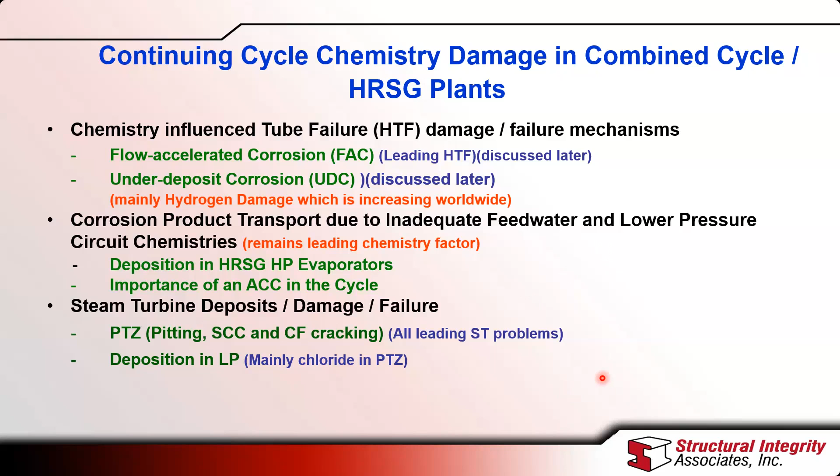I have to click this each time. So here's just an indication of the damage that occurs in the steam turbine. I show this because I'm going to deal with the tube failure mechanisms in detail. The two main ones that take place are corrosion fatigue of blades and discs in the phase transition zone of the low pressure turbine, which I'll explain, and stress corrosion cracking in the discs. You'll see some pictures here, and I'll talk about a few of these in more detail.

What we've come to recognize over the years of conducting a large number of assessments in combined cycle plants and conventional plants, now over 270 plants worldwide, I'll show you the data from this a little later. It confirms that all of this failure and damage you've just seen can be related directly to plants operating with what we call repeat cycle chemistry situations. There's basically nine of them. I'm going to highlight some of these for you, but these are areas where plants are not addressing the chemistry in an optimum fashion, and I'll talk about each one as we go through here.

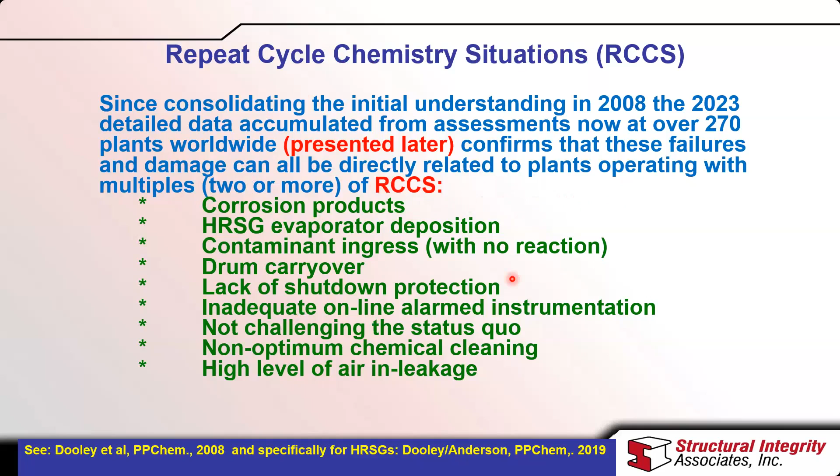So let's provide 3 examples. The first example is going to be on hydrogen damage. This is an under deposit corrosion mechanism, basically because the damage takes place under a heavy deposit on the HP evaporator tubing. There have been multiple cases already this year of this mechanism, and it's becoming very important.

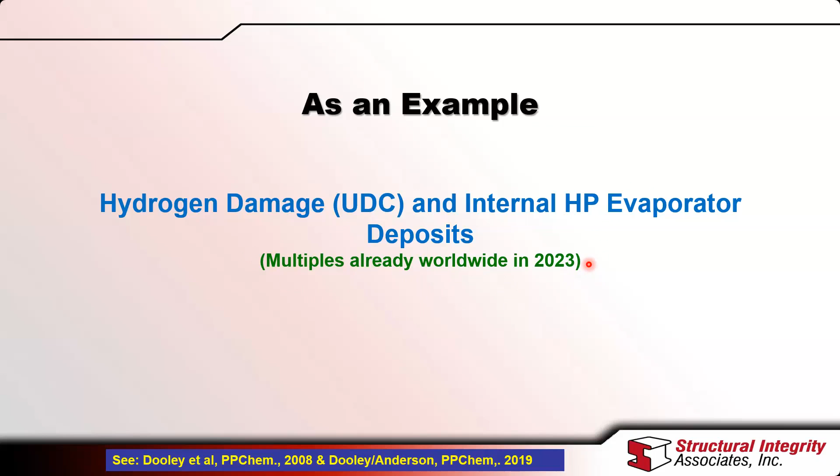It's a little bit distressing because we understand pretty much everything about hydrogen damage. So these are some of the examples that we have collected. Here you can see an HP evaporator tube, and you can see some very heavy deposits, internal deposits, and some quite serious corrosion just taking place here.

When we look at the inside surfaces, you see, expect to see heavy deposits like this. You cannot have hydrogen damage or under deposit corrosion unless you have these heavy deposits. The failures that occur are usually similar to this, like a little window or a thick edge failure takes place, and this is a result of this corrosion. You can see the corrosion here eating its way through the wall of the HP evaporator.

If we look at detail along this interface here between the corrosion and the metal, you'll see this light area here, which is the chloride, and the chloride is concentrated at the bottom of these deposits. It can only concentrate at the bottom of the deposits, and so this is very important. Sometimes we can't analyze this, but we know that it's there because of the mechanism.

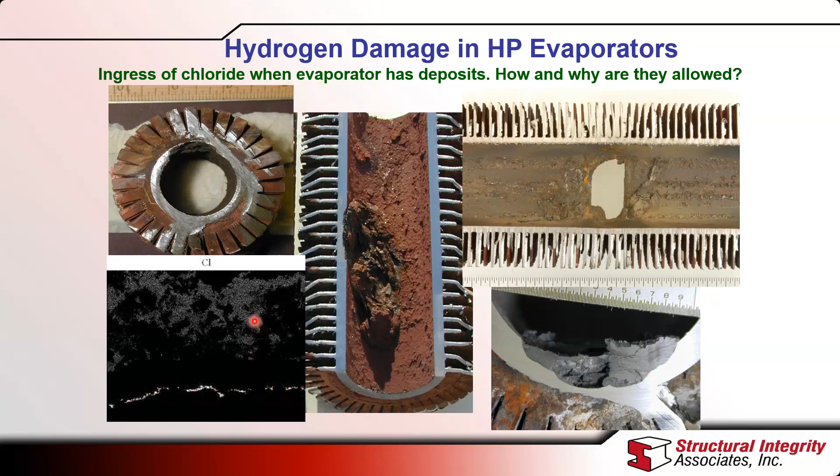So these are some of the typical repeat cycle chemistry situations which lead to hydrogen damage. These are the things that you need to look for to see if hydrogen damage is going to be a possibility in your HRSG. The main one I've already mentioned is excessive corrosion products.

This is the total amount of iron that moves from other places in the cycle - from the lower pressure cycles, the low pressure evaporator, low pressure economizer, IP or HP economizer - and deposits out in the HP evaporator. Most often you can see that these levels of iron exceed the local guideline values, and I'll show you the guideline values in a minute.

Sometimes these corrosion products are not measured properly, and sometimes plants only measure the soluble part of the corrosion product. So that doesn't measure the total amount of corrosion products being transported. These corrosion products flow into the HP evaporator and form deposits on the surface. Most often plants have not taken samples of the HP evaporator to identify whether those deposits are great enough to cause hydrogen damage to take place.

And there's a particular guideline for that, which I'll show you. The other main aspect, the third part of hydrogen damage, is that there has to be some contaminant enter into the cycle - usually in the form of chloride or seawater in seawater cooled plants. These contaminant levels are allowed to exceed the shutdown limit or the action level - the chemistry action level or the chemistry shutdown limit.

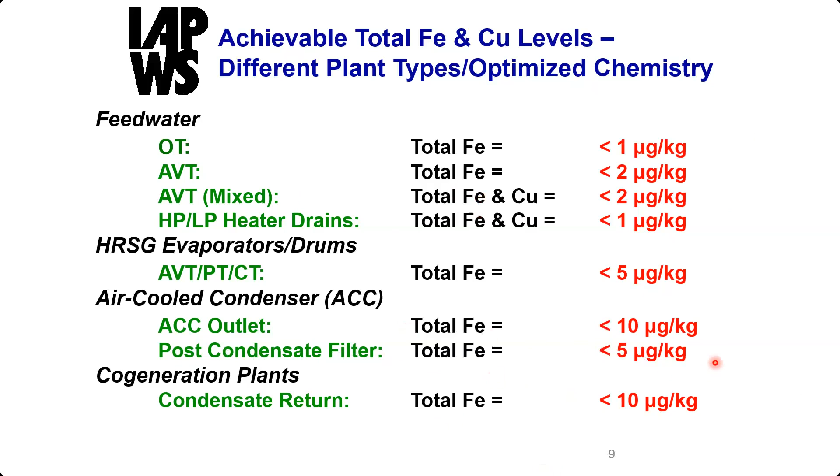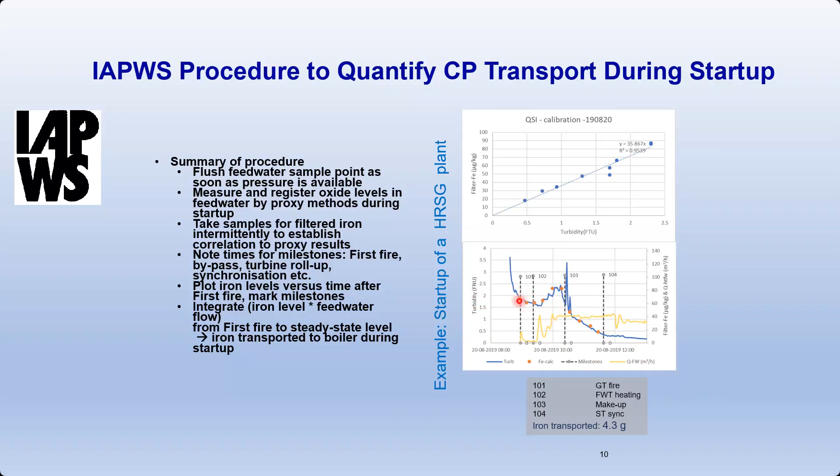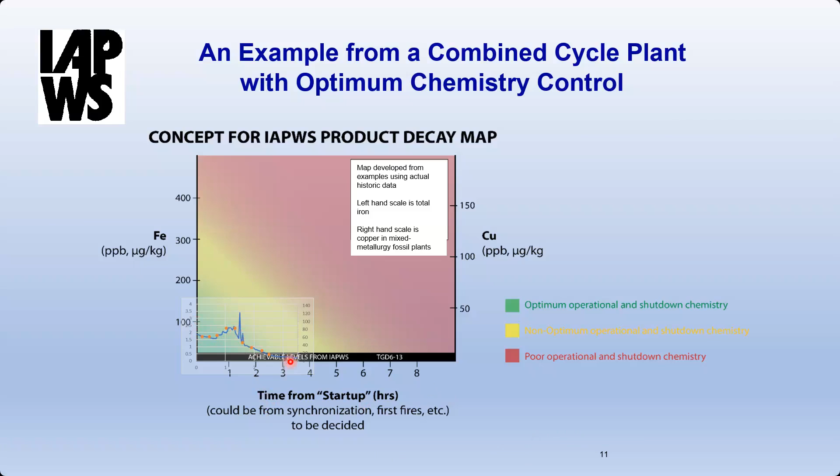So this is a very powerful new tool that we're working on. We have already published a white paper on it, IAPWS has published a white paper, and we'll be publishing a final guidance document probably next year.

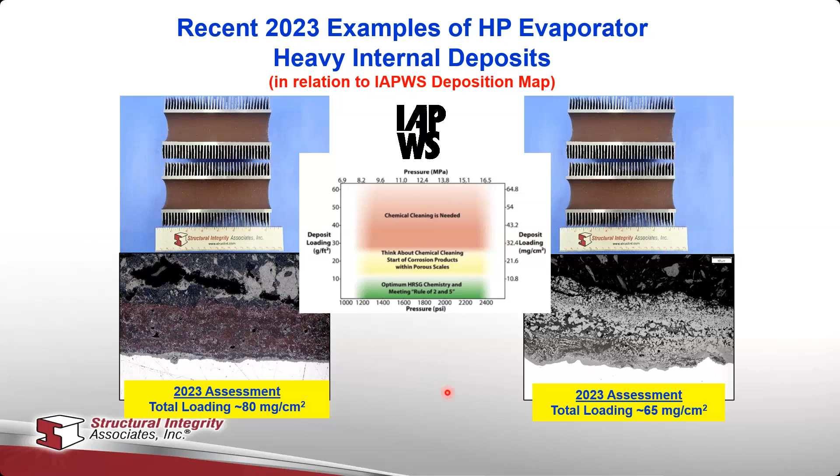So the idea is to take these samples at regular intervals so you can make sure that the deposits are not building up on the internal surface of the tubes. So that was the first example.

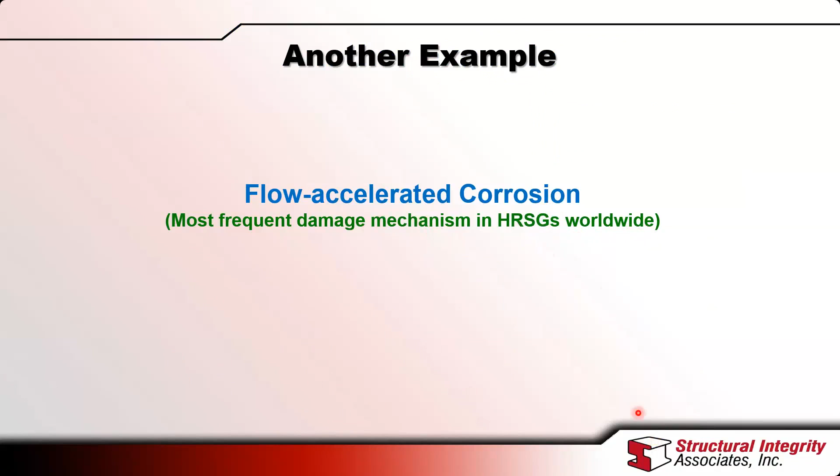The second example is flow accelerated corrosion, which, as I mentioned before, is the most frequent damage mechanism in HRSGs worldwide, and we still see many of these every year. I'm going to show you some examples of FAC in combined cycle plants.

Over the last 10 or 15 years, we've not seen any new locations or situations where FAC can take place. But one common issue is that plants and operators tend to mix up the difference between single phase and two-phase FAC. In a combined cycle HRSG, you can have both single phase, 100% liquid or water, and two-phase mixtures of steam and water. These are still occurring worldwide and not being identified properly.

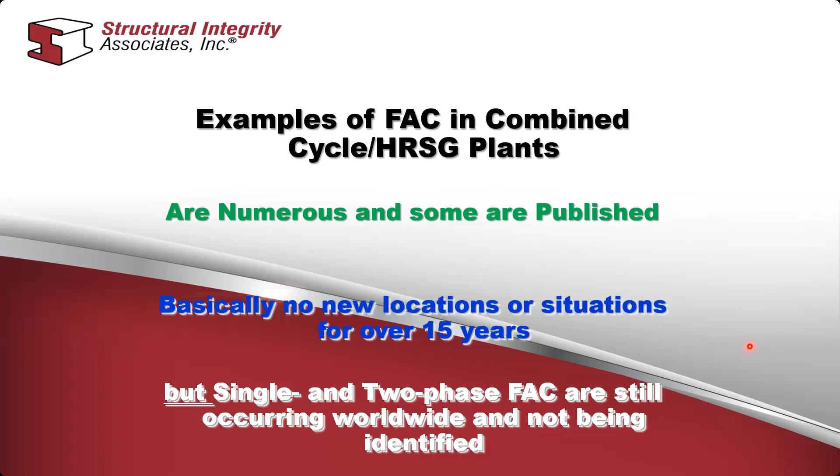So one of the things I wanted to show you was some examples of how to make that distinction. The importance is that each one of these mechanisms, single and two-phase, are dealt with differently from a chemistry point of view. You can switch them off by different aspects of the chemistry, so it's important that you identify exactly which mechanism you have.

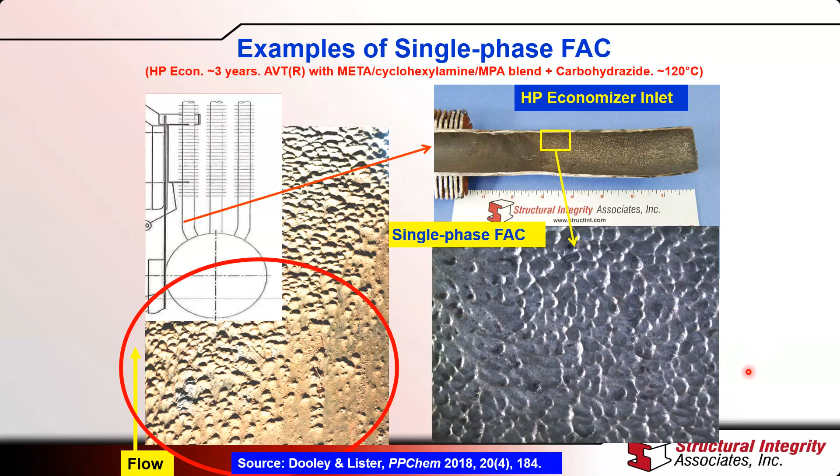Contrast that with this example, which is two-phase FAC in the LP evaporator, usually at the top where there's a mixture of steam and water. Here you can see this black shiny appearance - the very typical appearance of two-phase FAC. It's always black and shiny like this, and just about where it's starting, you can see these little dimples. These are dimples of FAC, very characteristic - you do not see these dimples on single phase FAC. So these are the characteristics: you see this orange peel type of appearance for single phase, and for two phase you see this black shiny appearance.

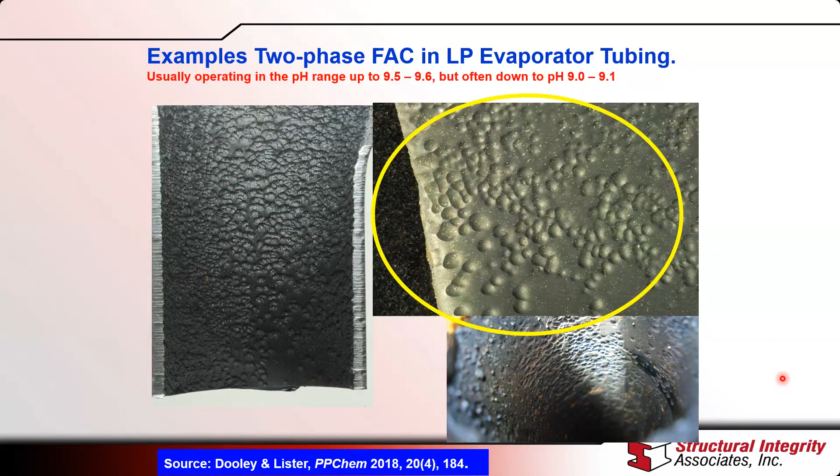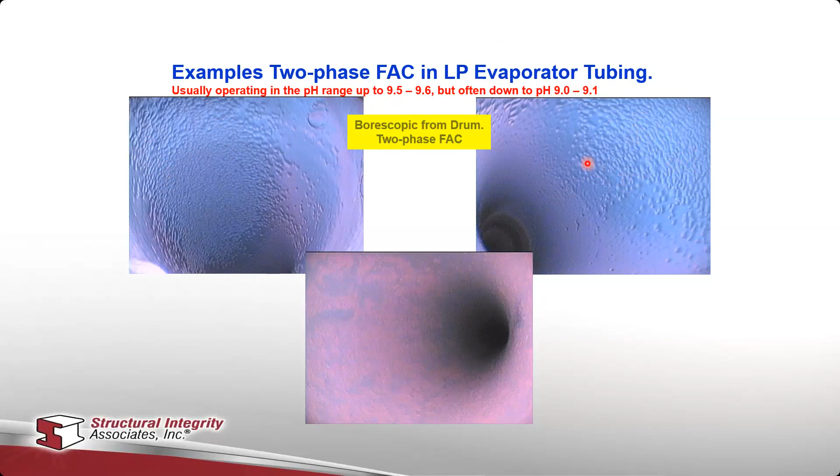This shows using a borescope from the drum, looking down at LP evaporator tubing - you can see this two-phase black shiny appearance of the FAC. If you look at these surfaces in detail under a high power microscope, a scanning electron microscope, you'll see this appearance - what we call the scallops of FAC. You have to be able to see this appearance at higher magnification to confirm the mechanism is FAC. This is very characteristic scallop appearance that occurs for both single and two-phase FAC.

So these are repeat situations which lead to FAC - they've all been observed numerous times. Generally what we find is that FAC results from incorrect feed water, condensate, and LP chemistries, with the most common one being the continued use of reducing treatments, which we call AVTR, all volatile treatment reducing. For the two-phase part, we generally find the pH of operation is too low and not adjusted or monitored by checking the iron to see that it meets those guideline values I showed you before. So most plants don't monitor the feed water corrosion products, so they don't have any indicator of whether FAC is taking place.

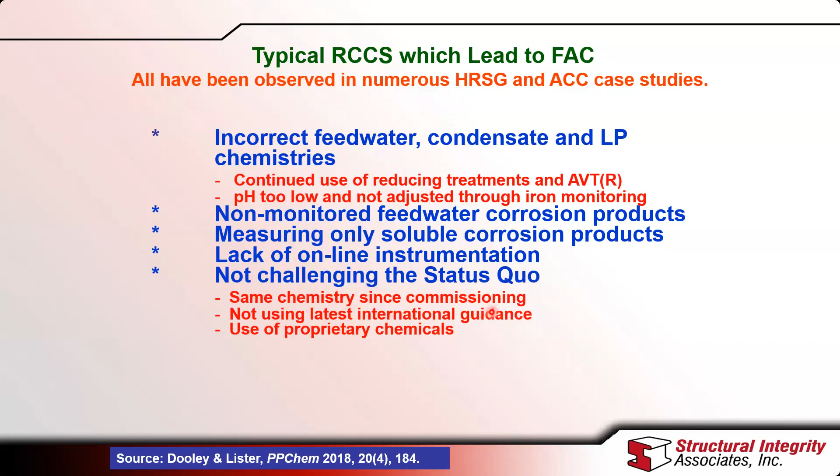And then, of course, you have the not challenging the status quo - many plants that we go to operate with the same chemistry since commissioning, not using the international guidance from IAPWS, which I'll show you at the end, which is freely available for you to use.

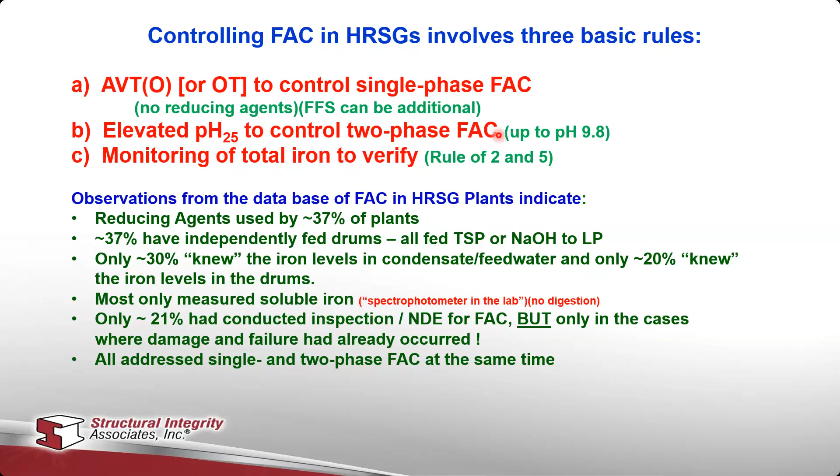So controlling FAC in HRSGs involves three basic rules. First, operating with oxidizing treatment - that's the all volatile oxidizing or oxygenated treatment that controls the single phase part of FAC, meaning no reducing agents should be added to an HRSG, only operating with oxidizing treatments. Then, operating with an elevated pH to control the two-phase part of FAC, and sometimes, especially with an air-cooled condenser, you might have to go to pH levels approaching 9.8. We know that if you monitor the iron, like I showed in the guidance previously, operating with feed water iron less than 2 and drum less than 5 would provide an indication that the chemistry is okay on that particular cycle.

So here, just to emphasize, these are the directions taken to address single phase FAC.

I've already mentioned a couple of times that you have to use oxidizing environments. Do not use reducing agents or reducing treatment. Things to look for would be the level of oxygen at the condensate pump or boiler feed pumps. You want the LP and IP drums to be ruggedly red, which would indicate that you're operating on an oxidizing cycle.

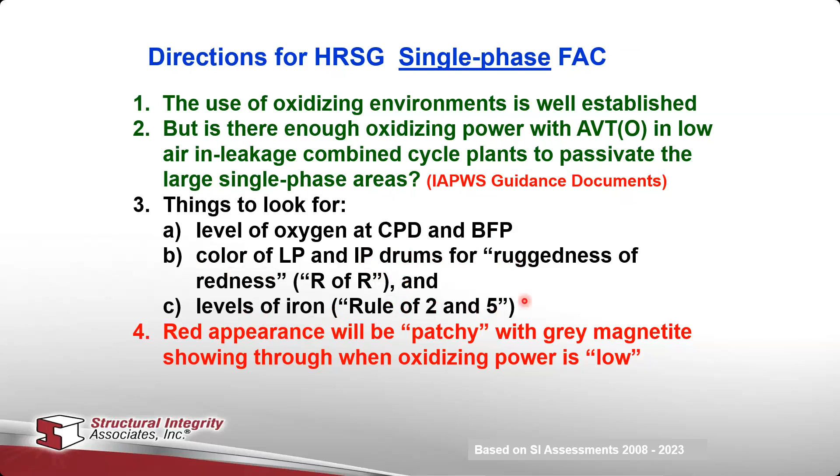When you monitor the iron, you want levels less than 2 ppb at the feed water and less than 5 in the drums. These are the key things for single phase FAC, and these are some of the similar things for two-phase FAC.

Once a plant has controlled the single phase by applying those rules, you want to ask whether the total iron matches the rule of 2 ppb in the feed water and 5 ppb in the drums. Things to look for very clearly would be that the level of iron in the LP and IP drums is greater than 20. Sometimes we see this greater than 100 ppb. You can measure the wall thickness of the tubes at the top of the LP evaporator.

Gradually increase the pH of the condensate and feed water towards 9.8. But as you're doing that, monitor the iron to make sure the iron levels are decreasing. So these are the simple rules for single and two-phase FAC.

The third example I want to mention is in the phase transition zone of the steam turbine. These are failures and damage that occur in this phase transition zone, indicated right here. This is a plot of the Mollier diagram, and this red line is the saturation line, and this black line here is the expansion through the turbine. This last part here is the part we're interested in.

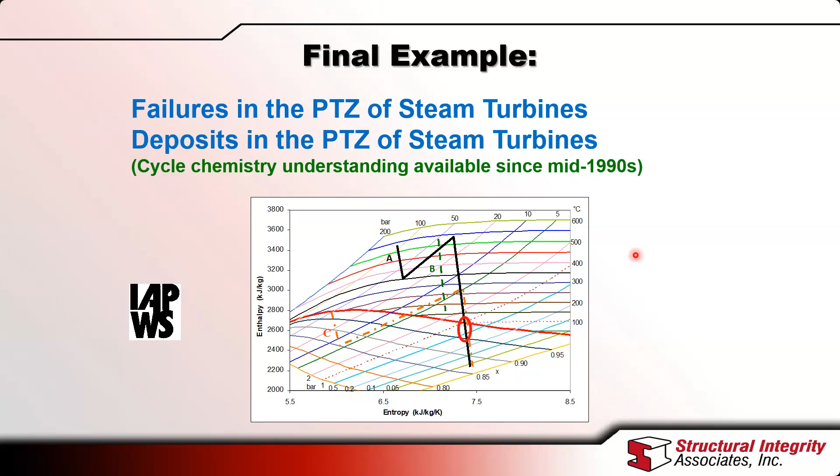This is the expansion through the LP turbine. As that expansion line crosses the saturation line, this is the area we talk about in terms of the phase transition, where the superheated steam starts to change to condensate. This is the area where all these failures take place, because of this phase change. These are some of the damage that we see in the blades.

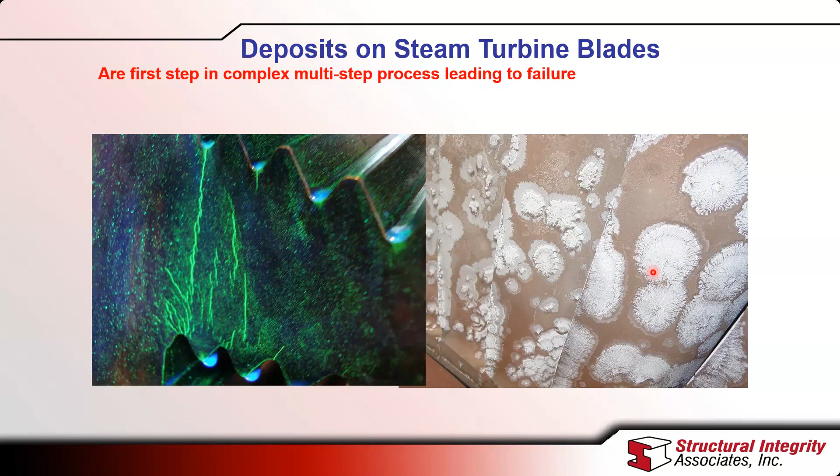We sometimes see in the attachment areas, when we do the NDE, these cracks that go across the engaged threads, and sometimes deposits on the blades themselves. The most important thing to look at is whether the blades and attachment areas are pitted. You can see some good examples here of pits.

Why is that important? Because all the failures that take place in the phase transition zone are initiated from pits on the surface. You can see right here, initiation of the failure is at a pit, and this is also initiated at a pit. All the failures we look at are initiated at pits on the surface.

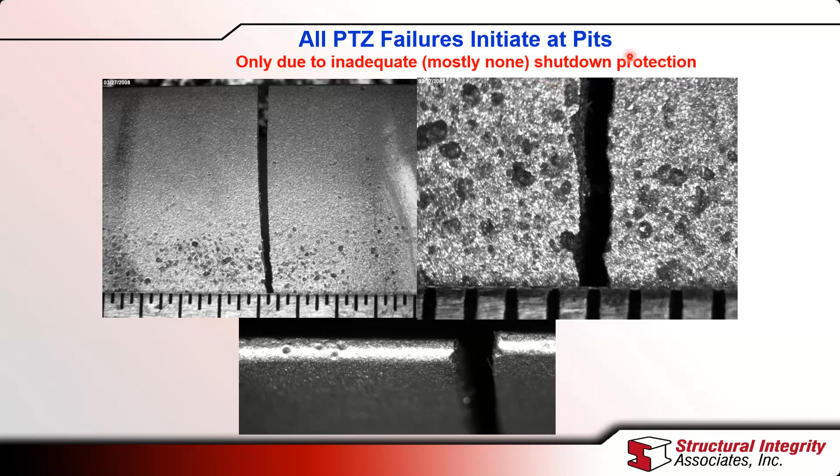And that's because there is some inadequacy of shutdown protection. Most often we find there's no protection in terms of adding dehumidified air to the low pressure turbine. These are very common, and these are the typical cycle chemistry situations which lead to phase transition zone failures.

Hopefully by now you get the idea that if you allow the chemistry to operate with these RCCS, there's a good possibility that you will have these failures taking place. So the ones that are important for phase transition zone are given right here.

You can see repetitive contamination above the steam action levels or above the shutdown limits, a lack of proper online instrumentation to measure the chemistry properly, no knowledge of the carryover from the drums as that goes right into the steam, and no low pressure steam turbine shutdown protection with dehumidified air, and or perhaps using some of the new chemistries like film forming substances. These are the main areas we look for when asked to investigate phase transition zone failures.

That was three examples of how important these repeat cycle chemistry situations are for the major failure mechanisms and damage that take place in HRSGs.

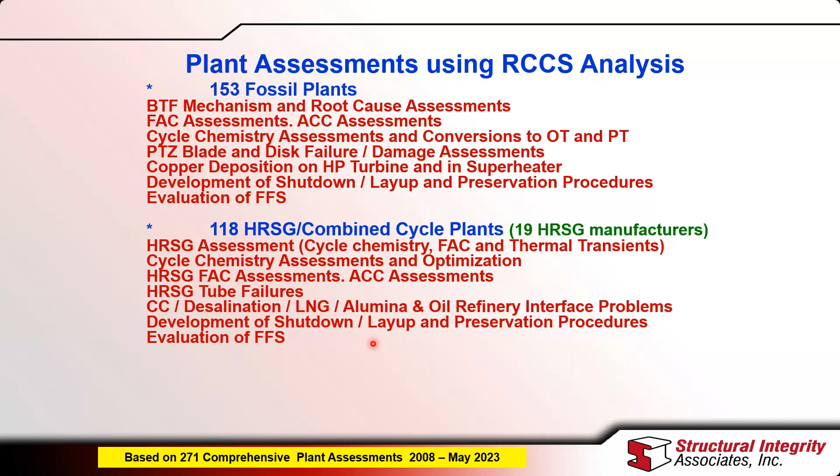So we looked at nearly 120 HRSG plants around the world and acquired detailed data from each one of those. These include, I think the latest count was 19 or 20 HRSG manufacturers. We tend to see the same things in each one. These are the assessments that have been done for cycle chemistry, for failures, for FAC, etc. And the data is on the slide right here.

So this shows you the data. These are the categories that we've been talking about. The 9 factors right here: corrosion products, online instrumentation, not challenging the status quo. These are what I've just been talking about.

In the blue column is the data from the fossil plants, and in the green column is the data from the combined cycle plants. The numbers here represent the percentages of those units that have this repeat cycle chemistry situation as a factor in their operation.

The interesting thing is the data is very similar across the two sets of plants, but the most important area that is not addressed properly around the world is the monitoring of corrosion products, the monitoring of total iron, and making sure that it reaches those guideline values that I talked to you about.

The second one would be down here in terms of not having the online alarmed instrumentation that's in agreement with the IAPWS standard that I'll show you in a little while.

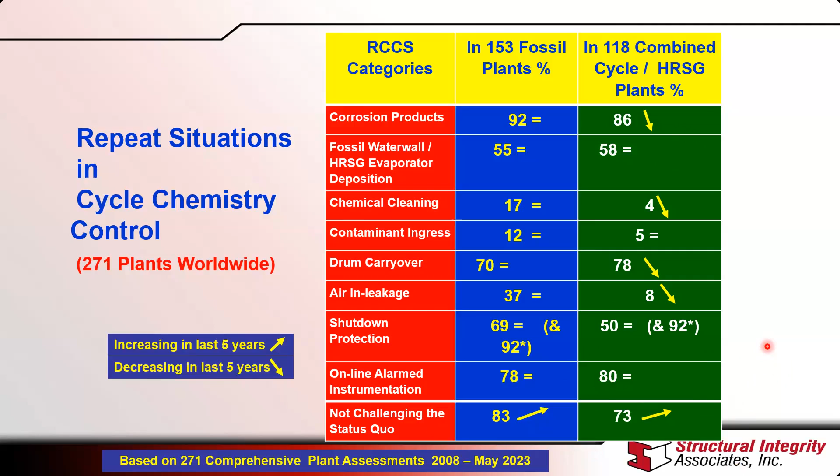For the condensate and feed water treatment, make sure you do not operate with reducing agents and only operate with AVT(O), and make sure that if you want to add an alkali to the low pressure system, then you follow the guidance that is available, and have a fundamental level of instrumentation which agrees with the IAPWS guidance. For the steam turbine, provide some shutdown protection and make sure you identify these repeat cycle chemistry situations and address them.

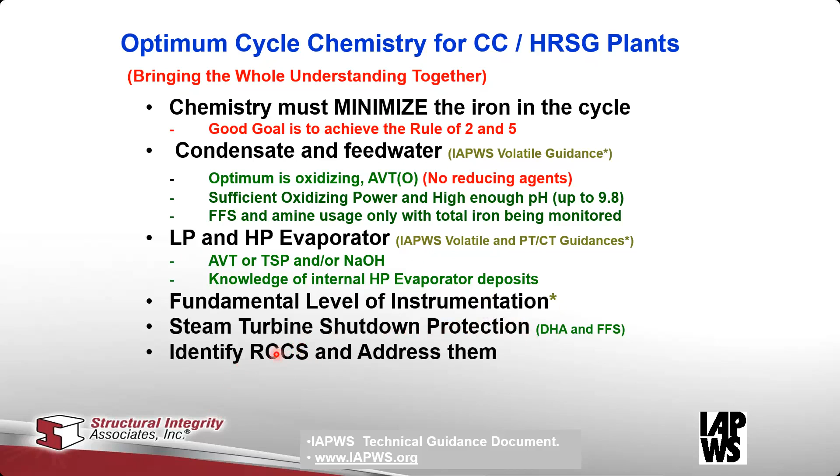So these are the really key things that the chemists and operators in the plant need to be aware of.

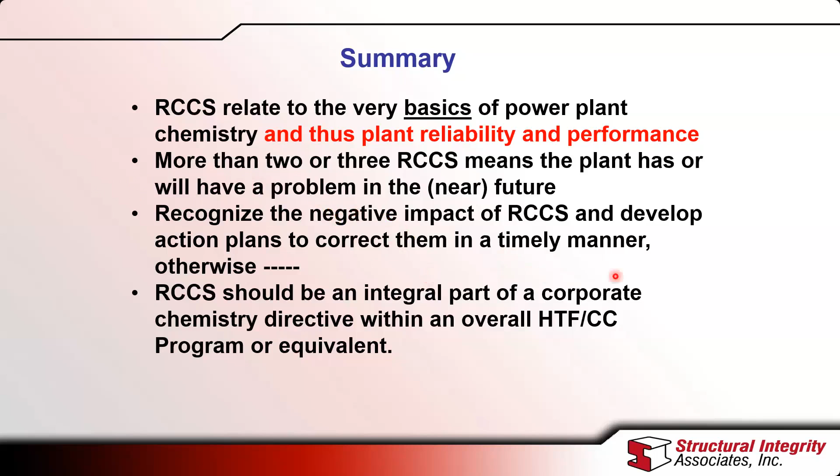So this just says that the RCCS are related to the very basics of power plant chemistry. If you identify one of these, it means the chemistry is not optimum, and therefore plant reliability and performance are at question. And what all the data tells us is if you have 2 or 3 of these RCCS, then the plant will have a problem, or maybe has already had a problem, and you need to address these and eliminate them from the operation.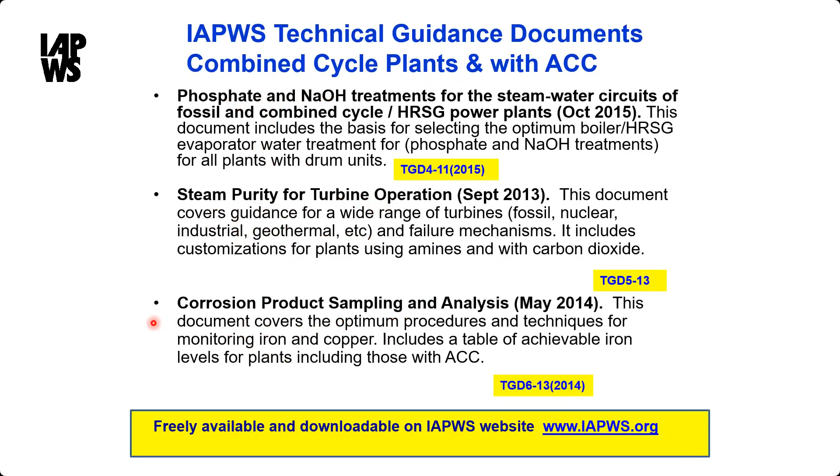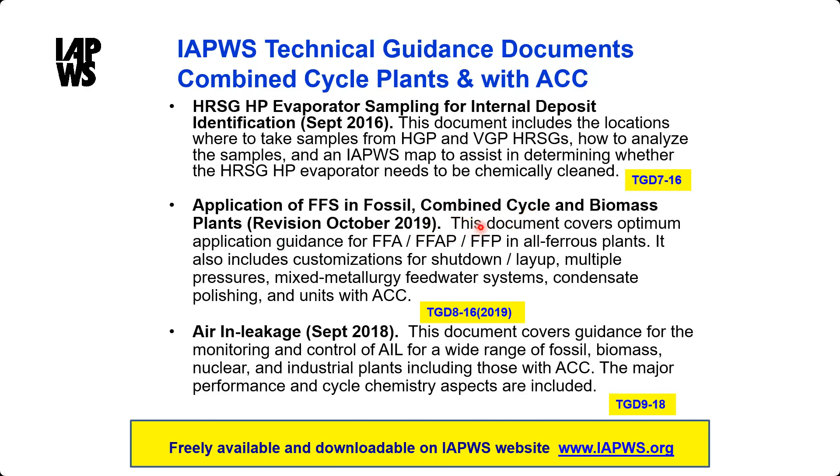What are the achievable levels? This one here shows you how to sample HP evaporators to measure internal deposits, and provides that IAPWS deposition map for you to see exactly where you are in terms of whether you need to think about chemical cleaning or not. Then there's two new guidance documents on film forming substances. One's for HRSGs and fossil plants, and the one on the second page here is for industrial plants. And then there's special guidance for generator water cooling. So these are the IAPWS guidance available for you. Scott also has these available if anybody wants them, but as I mentioned, you can get them straight away on the IAPWS website, right here.

If there aren't any more questions, Bob, then I suggest you go ahead, and if anybody has some at the end, we can come back to them. Okay, very good. Bob, just a question about what you mentioned recently, you mentioned one person from Argentina who is the leader, let's say the representative for this organization in Argentina. Could you repeat the name of this person? And also, is the information on the web? Yes, so I can mention it, but the name is Horacio Corti, and you can get that information from the IAPWS website that I showed you. So you go to iapws.org and look for national contacts, and look under Argentina. You'll see it. Okay, I see in the chat. Okay, thank you.

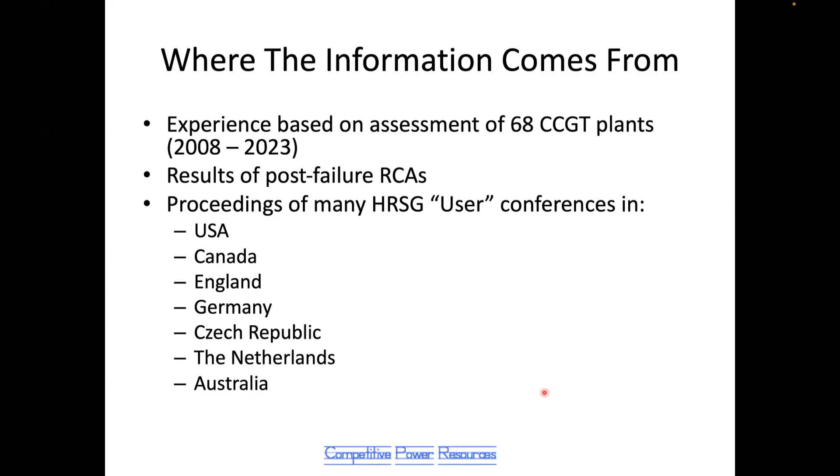Since 2008, as Barry said, we've been doing assessments of power plants. To date, there's been 68 assessments of thermal transients at combined cycle plants. This information also comes from results of post-failure root cause assessments that have been done occasionally, and from the proceedings of user conferences in the United States, Canada, England, Germany, Czech Republic, Netherlands, and Australia. Maybe someday we can add Argentina to that list.

These thermal transient surveys have been performed on 1x1 combined cycle units, 2x1, 3x1, 4x1, and combinations of HRSGs with 2 steam turbines. We've done single shaft and multi-shaft arrangements. These plants range from 4,000 hours to 160,000 hours of operation at the time the survey was performed, and they range from 43 to 2,424 starts at the time it was performed.

This group of 68 plants, some of them have had no tube failures, and there's one that has had 89 tube failures, if you can believe that.

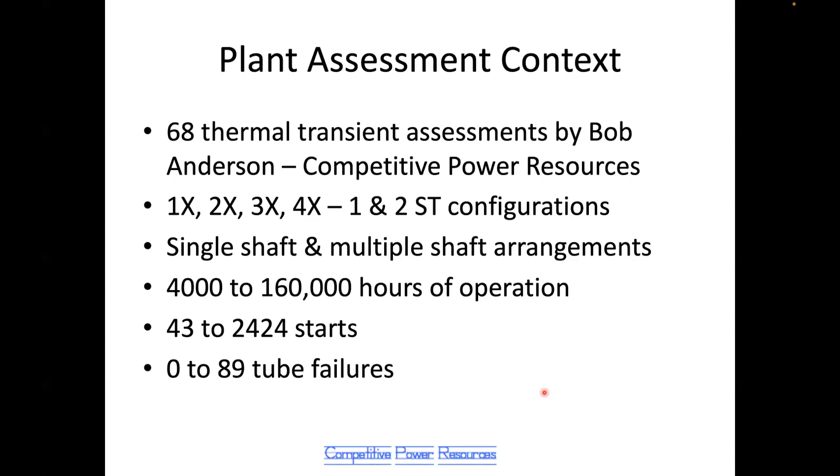There are 23 HRSG OEMs represented in this group, consisting of vertical and horizontal gas path, recirculating evaporators and once-through steam generators, conventional HRSGs and ultra-fast startup designs, 1, 2, and 3 pressure units. Some are reheat, some are non-reheat. Some have duct burners, some do not, some have stack dampers, some don't, and some have diverter dampers to allow the gas turbine to run in simple cycle.

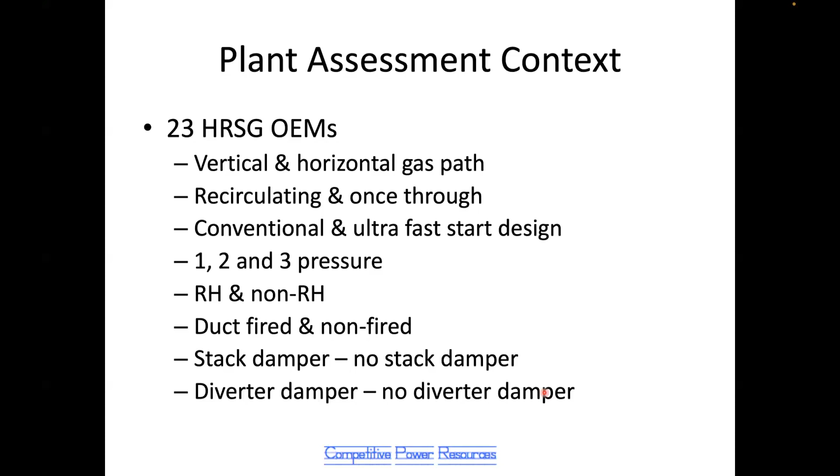There are 5 gas turbine OEMs represented, both industrial and aeroderivative class machines. There are 11 different steam turbine OEMs in this group, some condensing, most condensing, and a few non-condensing. There's seawater, river, cooling tower, and air-cooled condenser applied to these units, and there's every possible type of cycle chemistry known to man that Barry has evaluated.

So some key observations from all this before we begin. The causes of HRSG tube failure are not associated with any one HRSG manufacturer. All HRSGs can run well and have no failures, and all HRSG manufacturers have units that have had failures. So it's much more to do with other issues than who built the HRSG and its specific design.

Most of the causes of tube failure that were identified in 2008 continue to be a problem. Even though we know how to avoid these things, they continue. The ranking of what causes the tube failures has also not changed. So in summary, we know all we need to know to avoid HRSG tube failures, but many plants don't apply this knowledge.

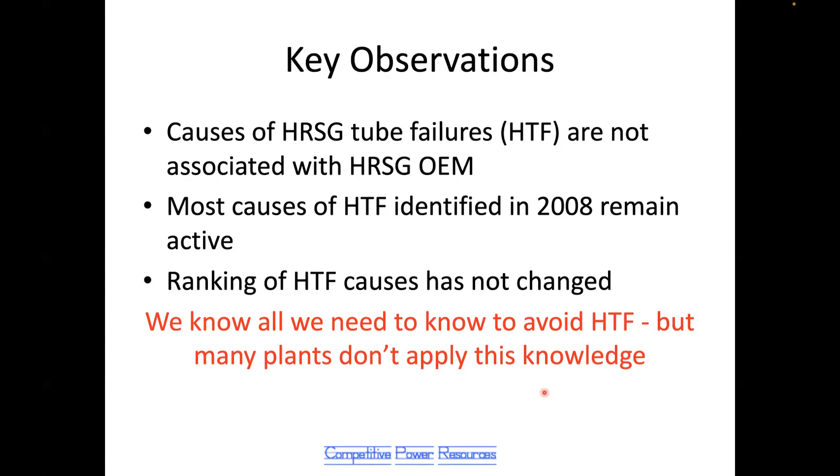Very few of the tube failures occur due to a one-off event. As Barry mentioned with the chemistry, repeated events are generally required to cause a thermal transient driven tube failure.

Very few tube failures occur due to creep damage. Creep damage is operation of the pressure part at a high temperature and at pressure for long periods of time that causes a deterioration of the material properties. That is not a big problem with HRSGs.

Fatigue is the principal failure mechanism. Fatigue is generally associated with startup and shutdown of the units and sometimes with low load operation. Because fatigue is a cumulative, invisible, irreversible mechanism, if you identify the cause of thermal fatigue transients and eliminate those transients early in the life, you can avoid or delay the tube failure.

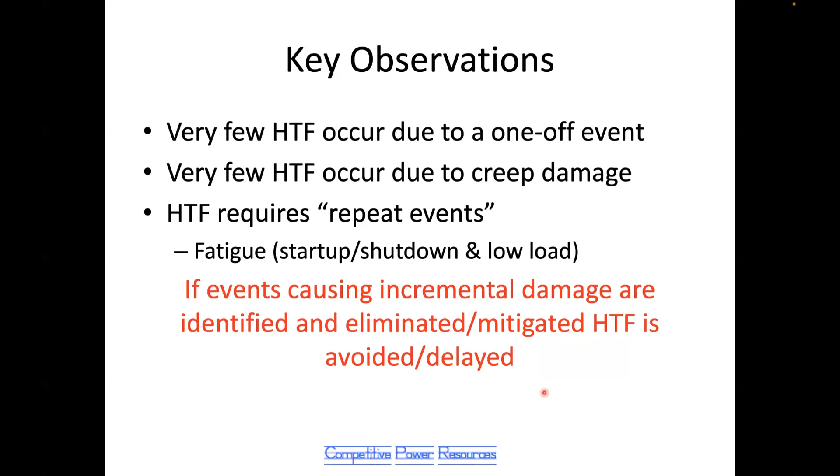So the actions required to break the repeated events cycle and avoid tube failure: you need to look early for symptoms of known causes of tube failure and take corrective actions promptly. If tube failure occurs, it's very important to physically remove the failure site so that you can send it to a metallurgical lab to determine the failure mechanism.

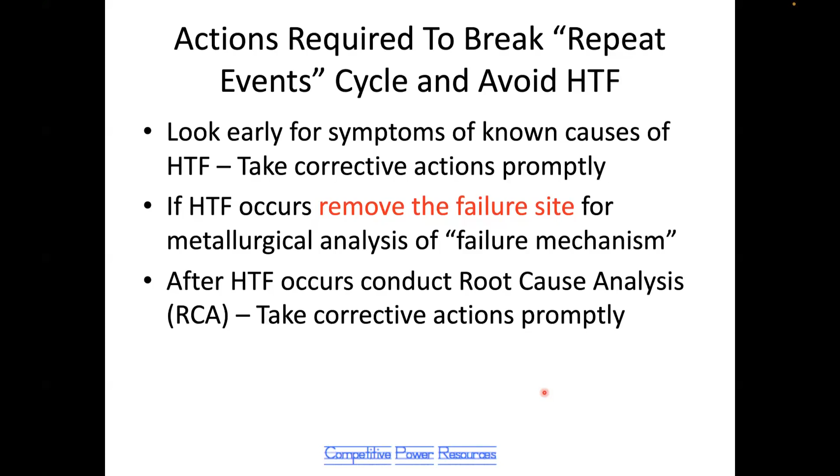After the tube failure occurs, a root cause assessment should be executed to identify what in the operation, design, or maintenance activities caused this tube failure or contributed to it, and then take corrective actions promptly.

So the primary cause of tube failure, as I said, is thermal fatigue. Thermal fatigue generally manifests itself at attemperators, HP superheater and reheater drains, to a lesser extent LP preheater and economizer inlet sections, and excessive high pressure drum ramp rates causing cracking in the drum.

So let's review some assessment results in these areas. As I mentioned a moment ago, it's important when you have a failure to remove the fracture site and send it off to the laboratory. That's the very first step in performing a root cause assessment to determine why the failure occurred and learning what you need to do to prevent future failures.

In 2008, none of the sample plants had a program in place to do this. Today, only 9%. So that's an improvement, but it's still far too low, which tells us that most operators have a failure and then they do not follow through, take a sample and do the root cause assessment. So they find themselves subject to repeated failures from the same cause.

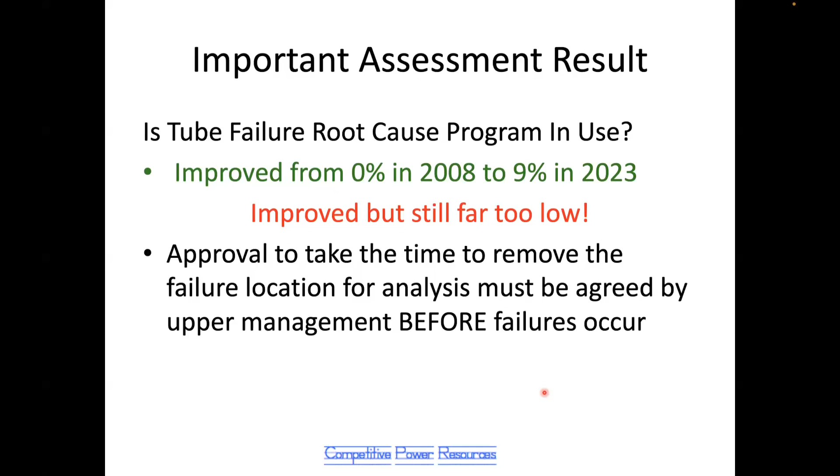The approval to take the time to keep the unit down rather than make the fastest repair possible, that discussion has to occur with upper management before failures occur. I can assure you, having been a plant manager, when the boiler is already shut down because it has a leak, no one above you in the chain of command is interested in talking about keeping it down longer. They want it back as soon as possible. So this is a process and a discussion you have to have with your boss and his boss long before the plant comes down and has a failure.

All right, enough preaching about that. Very briefly, ask questions about these later if you don't understand what I'm saying.

So the mechanisms that occur: accelerated creep occurs in plants that operate above 427C for sustained periods and significantly above their design temperature. As I said, creep is not a significant problem today causing failures. It occasionally occurs, but not very often. Thermal mechanical fatigue is the most common failure mechanism, and as I said, it's associated with major transients that occur mostly in startup and shutdown.

Creep and fatigue damage are both irreversible. They are invisible until the pressure part failure is imminent. So there's no NDE that you can do to identify that the fatigue life of a component is nearly expended and it may fail in the near future.

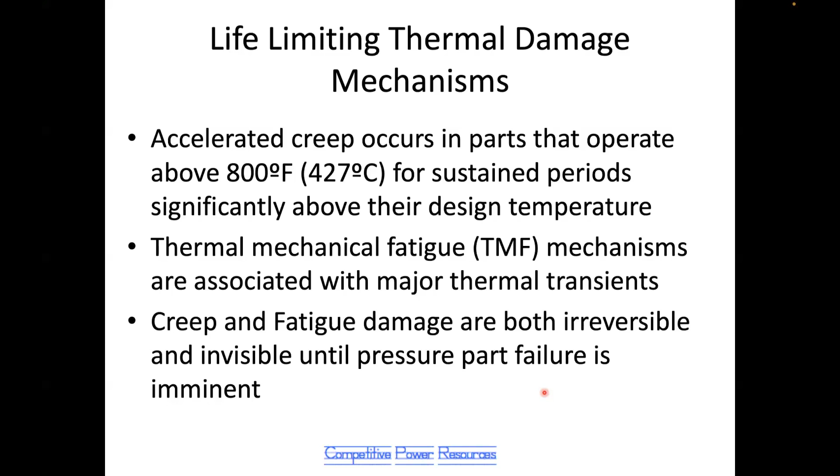Excessive creep damage is rarely a problem. I've already said all this, so I'm going to move on.

The two types of loading mechanisms that drive thermal fatigue most commonly are constrained differential expansion between interconnected components, which means, let's say you have two tubes connected to one upper and one lower header. One of those tubes operates at a higher or lower temperature than its neighbor. The tube that's at the different temperature will try to expand or contract compared to its neighbor, and that will create large system loads, generally at the tube to header weld.

The other type of transient is global through-wall temperature gradients, as might occur in a high-pressure steam drum during heating and cooling. This also applies to thicker headers and pipes of the superheater and reheater.

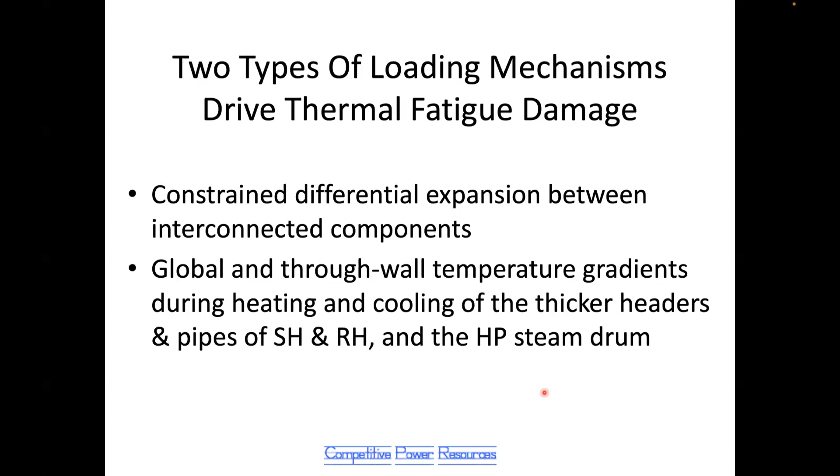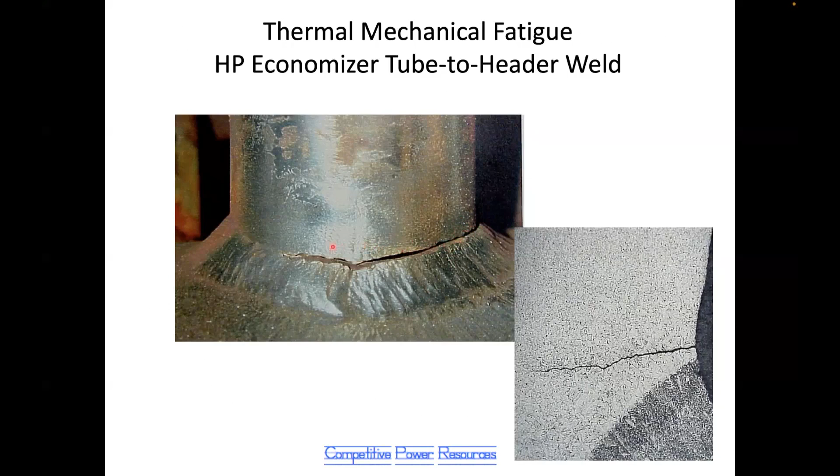This is a photograph of a typical thermal fatigue crack in a weld. It occurs at the toe of the weld in the tube material. This is very characteristic. Here's another photo of another one.

When the gas turbine runs at high speed to purge any combustibles from the HRSG gas path, this cool air passes through these superheater tubes. And so the superheater and the reheater become an air-cooled condenser if there's water vapor inside the tubes, which in the superheater, there is always water vapor because it's communicating with the HP steam drum.

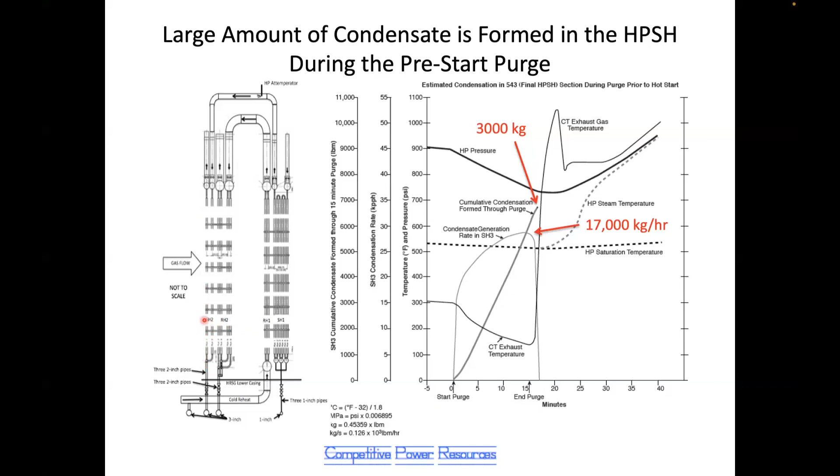This little curve is the calculated rate of condensation that occurs in just this one row of tubes. That rate of condensation peaks at 17,000 kilograms per hour. Over the 15-minute period that the purge is occurring, 3,000 kilograms of water accumulates in just this one tube section. That's enough water, if not removed, to flood up into the tubes.

When these tubes have steam in them, those tubes suddenly cool by 50 to 150 degrees relative to their neighbors that are still at 550. So these tubes shrink and cause the fatigue damage described in the previous slide. To avoid this, it's critical that the superheater - and everything I say about the superheater also applies to the reheater - this water must be drained out before steam flow is permitted to begin.

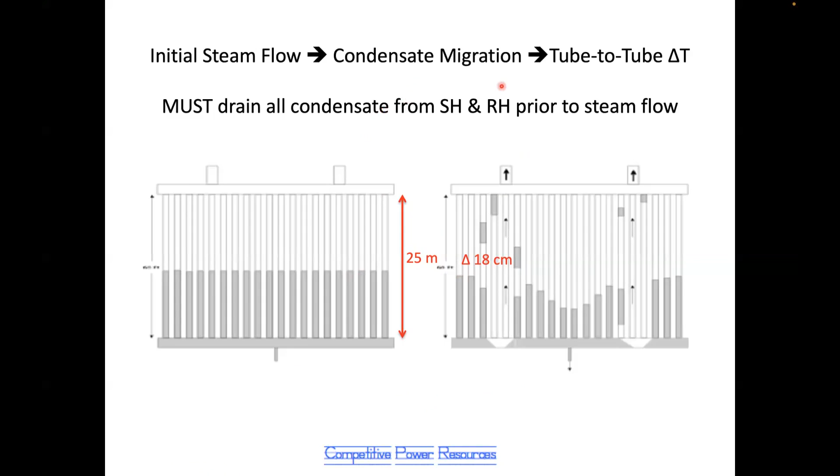Some of the design issues that have caused superheaters not to drain properly: if the drain pipe size is too small, the water can't flow through the small pipe rapidly enough to remove all the water before the steam flow comes.

In 2008, all of the drain pipes were too small on the boilers we looked at. Now, over almost 20 years, that has improved, and 60% of them now have large enough drain pipes. So people have learned from the mistake of putting drain pipes that are too small.

In 2008, none of the drain pipes had a continuous downward slope. Now about a third of them do, so there's some improvement there.

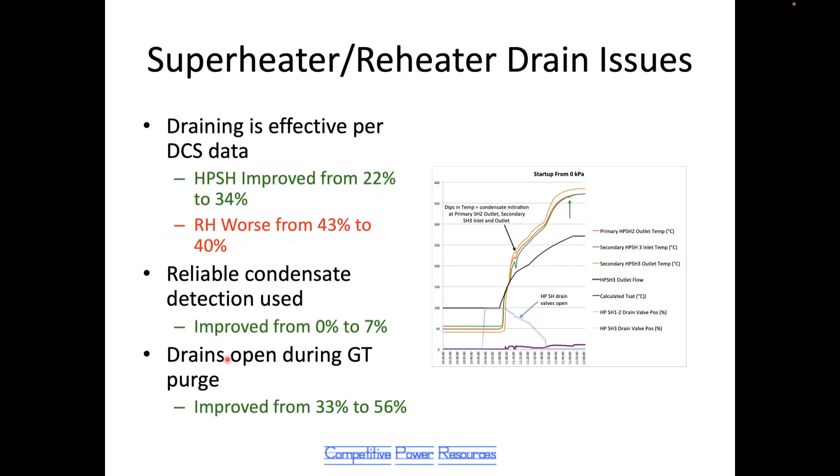All right. If you have any questions about drains, make a little note now, and we'll come back to them later.

Now, I'm only talking about HP, high pressure superheaters here. The IP superheater generally does not have an Attemperator on it, and it does not generally have problems with draining like the HP. So it's the HP superheater and the reheater that are of most concern.

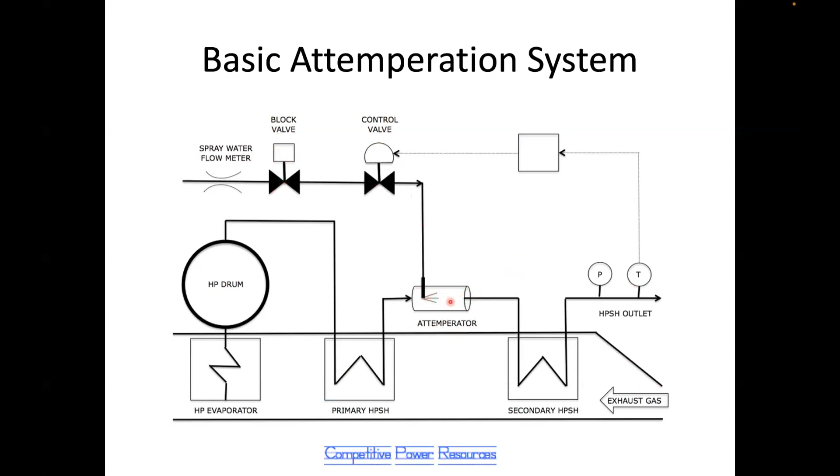The upstream and/or downstream steam pipe being too short is another problem. If the inlet pipe is too short, there's stratification and swirling in the steam entering the Attemperator that can disrupt the direction the sprayed water takes and cause it to impinge on the pipe wall. If the pipe is too short downstream, the water droplets that are sprayed do not have time to evaporate before they reach the downstream elbow, T, or nozzle.

Cracked spray nozzles or mast assemblies are a common problem. Sometimes nozzles or parts of nozzles crack and break off and go downstream. When either of these things happen, the size of droplets produced by the Attemperator gets much larger, or maybe no droplets at all—maybe it's just a stream of water pouring into the pipe if the mast assembly has broken off. Those things make it impossible for water not to strike the pipe wall and quench it.

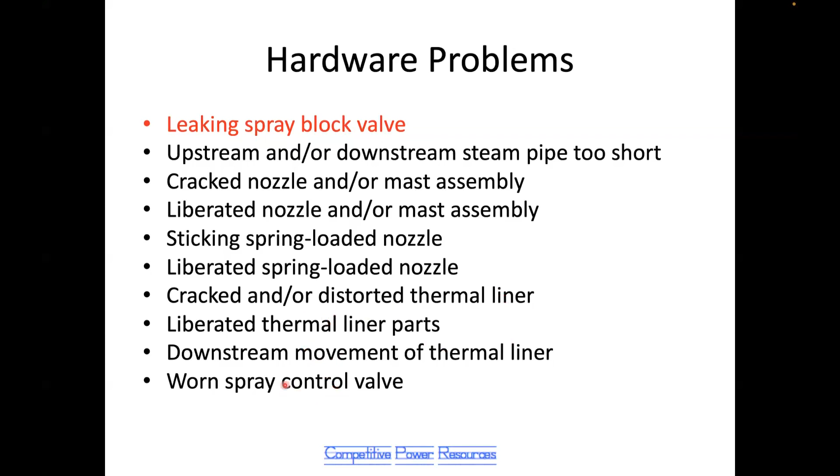Thermal liners are often installed inside the attemperator steam pipe to prevent water contact with the pipe itself. Those liners can become distorted or cracked if water impinges on them. If the liner starts cracking, parts of that liner can go downstream, or the entire liner sometimes will break loose and move downstream. A worn spray control valve will also negatively impact the quality of the spray.

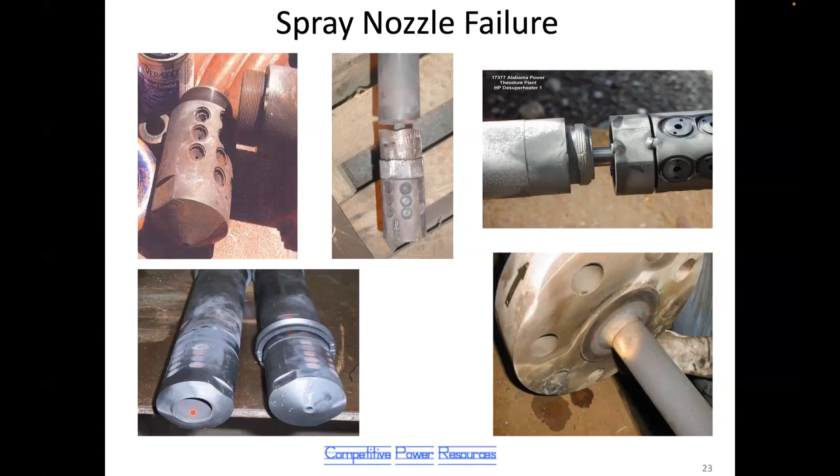Let's talk about leaking. This is the biggest problem, leaking valves. Overspray means more water is sprayed into the steam than the steam thermally has the capability to evaporate. There's only so much difference in temperature between the steam temperature and the water temperature, and that difference is what drives the evaporation of the water droplets. If you spray too much water, you cool the steam all the way to saturation temperature, and now no more water can evaporate.

Once you've cooled the steam to 25°C above saturation temperature, if you cool it any more than that, we consider that overspray. You're getting too close to saturation and you probably are doing damage in the pipework.

Some units are not able to spray enough water during startup to avoid exceeding the maximum permitted steam temperature limit at the outlet of the superheater. How to deal with that is beyond our scope today, but some units have that issue.

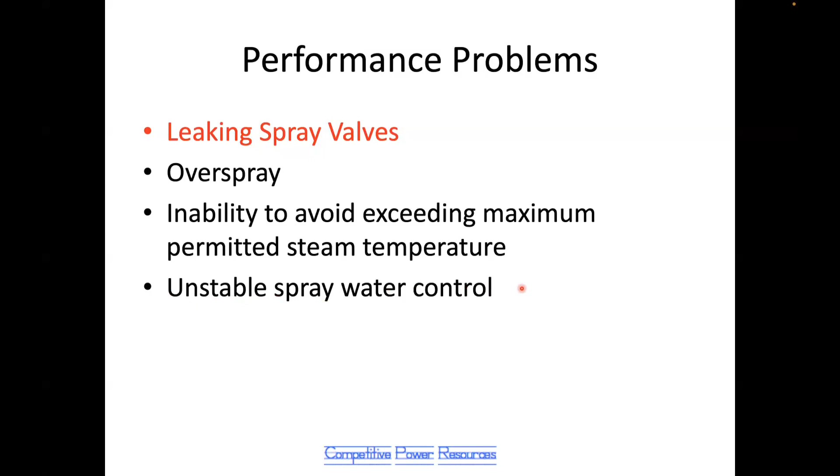Unstable spray water control can also cause problems. If a control valve is given a big step change, it will go wide open, fully open, when the process doesn't actually need that much water, and then it will close and then open again. If those things are occurring, that will cause impingement of water on the steam pipe as well.

So the unit starts up, the temperatures come up. The attemperator inlet and outlet thermocouples are in the same steam pipe, 12 to 15 meters apart. If there's no spray, one's in front of the attemperator spray nozzle, the other is downstream. If there's no water entering the attemperator spray nozzle, those temperatures must be the same. Early in the startup, when steam flow is low, if you see a difference in inlet and outlet, where the outlet is cooler than the inlet, that's an indication that water is leaking by the spray into the spray nozzle.

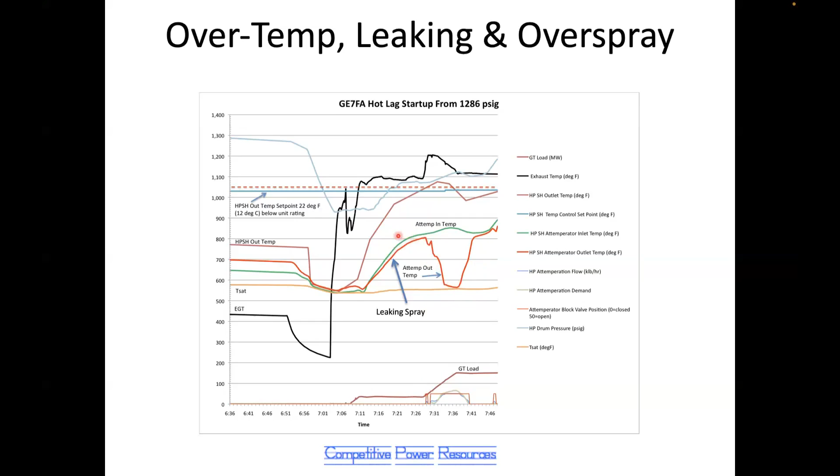Control problems. When we have the block valve and the spray control valve, we need some kind of logic to tell those valves when to open, one relative to the other.

Most units use a master-martyr logic that tries to protect the control valve from damage. Anytime you open a valve with high pressure on one side and low pressure on the other side, when you first open that valve, you get a very high velocity flow through a very small area between the valve seat and the valve disc. That high velocity water in that small space will erode the seating surfaces and cause the valve eventually to begin leaking.

Most designers want to prevent the control valve from leaking because it's a very expensive valve to repair. If you do that, the control valve opens first so that it has no differential pressure across it, then the block valve opens and takes all the damage. It's being martyred to take the damage in order to protect the control valve.

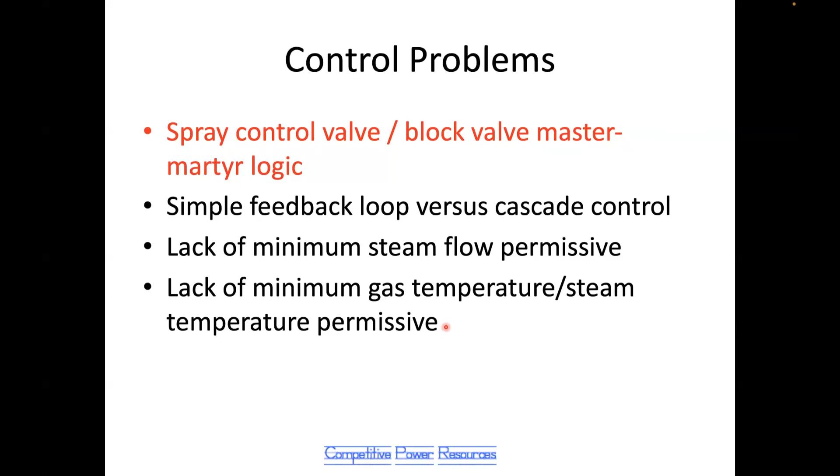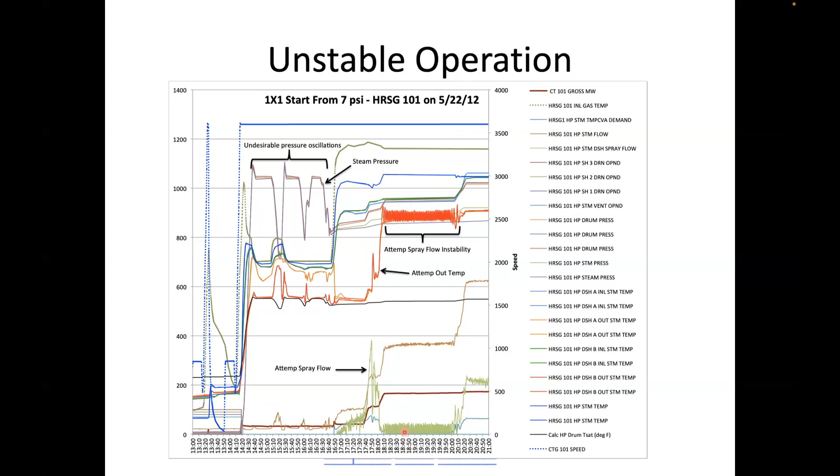This is unstable operation. This can be caused by wear in the control valve, where it's so worn it's not able to control the flow. It can also be caused by sticking of the control valve or sticking in the actuator for the control valve. It could also be a loop tuning problem, but the result is very rapid changes in temperature and a lot of rapid control valve movement, the green line here, which will wear the valve out even faster.

If you are passing water through a coil and you're shrinking the tubes, one effect of that is to cause the cracking that we discussed and showed you pictures of earlier. Another symptom is the tubes that get quenched can be quenched so hard that they actually yield and stretch. And so when they come back to normal temperature, they're too long to fit in the space, and they do this S-shaped thing. This is a photograph of some stretched tubes.

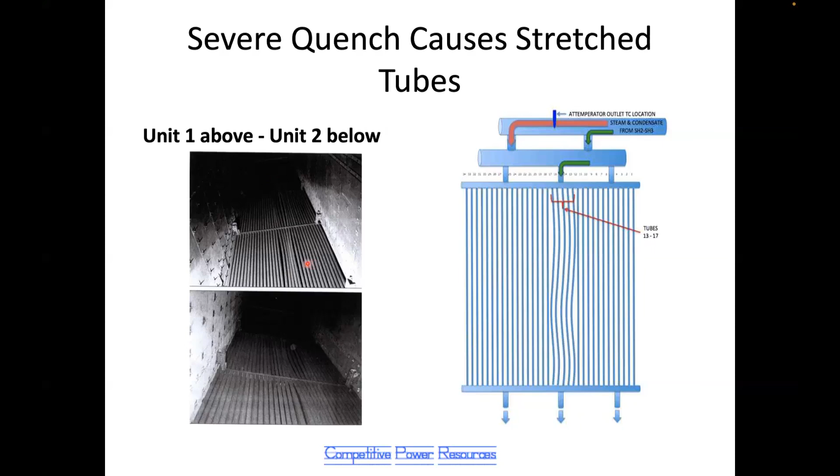Here's another photograph of stretched tubes. If you see tubes, when you go in and inspect the boiler when it's shut down and you see tubes stretched out of line, that's an indication that you had a substantial amount of cold water pass through those tubes and cause them to yield.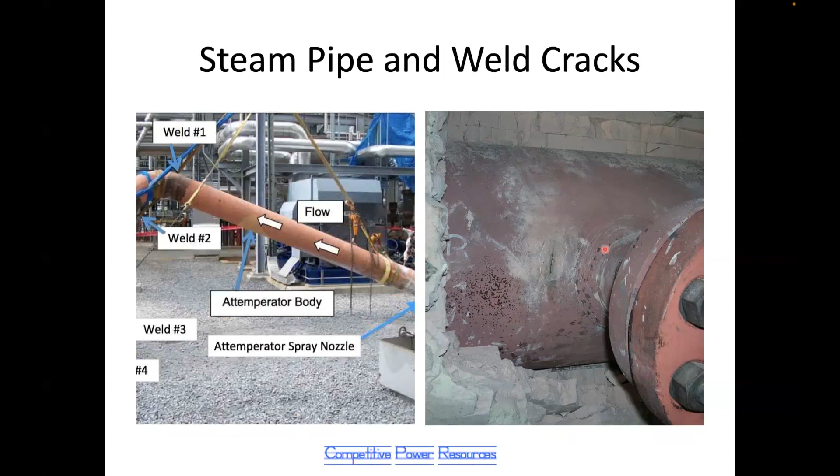Here's another very gross picture of stretched tubes. The other symptom is cracking in the steam pipes. This is an Attemperator pipe. The spray nozzle is located down here, and there are 4 welds on this pipe that all 4 of these welds were cracked due to this, in this case, overspray, severe overspray for a long period of time. Here's another crack at an Attemperator nozzle right here.

We saw that crack already. Here's a severe case where if you put enough water in an overspray or leaking event into a superheater tube, in some cases it will pull the tube completely off the header. This is relatively rare, but can happen. It's much more likely you would end up with a fatigue crack.

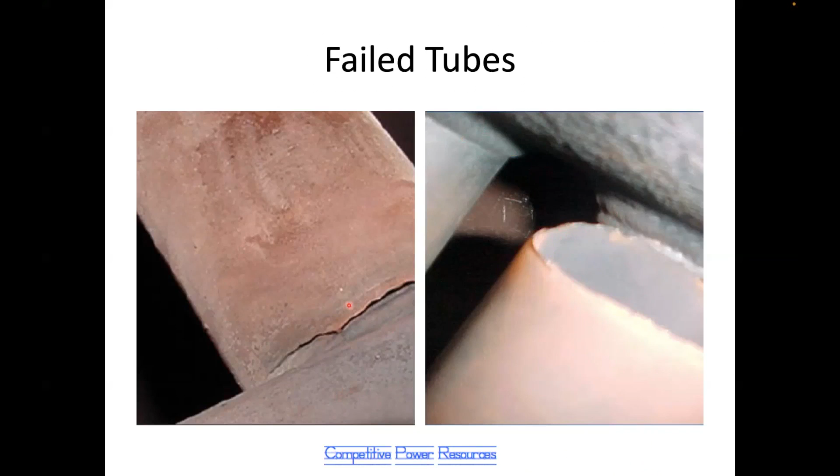All right, leaking spray water. It occurs, leaking spray water falling into the tubes. In this drawing, this cartoon, the Attemperators are at the top of the unit. There is no drain in this pipe work to remove leaking water. So this leaking water will either flow down the pipe into this coil or backwards into this coil.

78% of the units in 2008 were configured so that could occur. Today it's about half, because the ASME code changed in 2007 to require a drain. So this has improved considerably due to that. Still far too many units, though these are mostly older units that have not been modified.

Overspray in 2008 occurred in 25% of the units. Now it's gotten worse - almost half the units overspray during startup, shutdown, or low load. Leaking spray water wasn't measured in 2008; we weren't sensitive to that issue back then. But today, 83% of the units we survey have leaking spray water. This is the number one most common damaging problem.

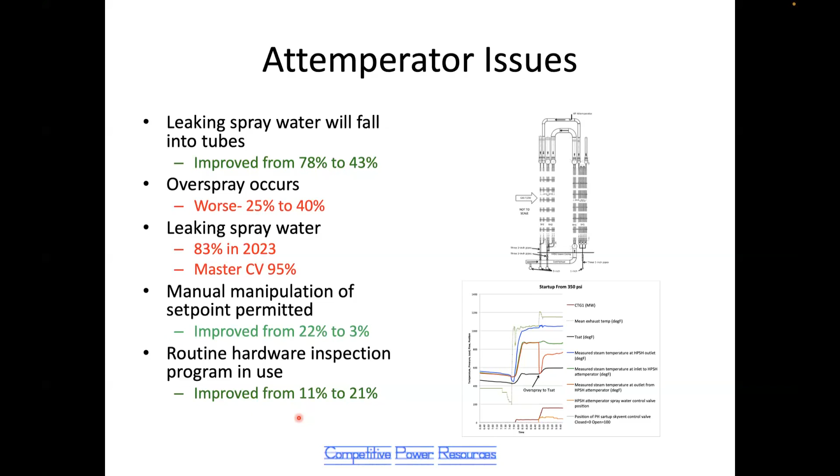Cracking in the HP drum downcomer. This is caused by excessive drum pressure ramp rate during startup or during depressurizing the unit on shutdown. Of the 68 units, about 30% of them have cracks in the drum, exceed the limit on temperature ramp rate, and have cracks in the drums.

This has become, as the units have gotten older - we didn't see cracking in these drums for the first 15 years once a large number of HRSGs began operating. But in the last 5, 6, 7 years, as units have aged, more and more units are experiencing cracking in the HP drum, generally at the downcomer on the inside of the drum - downcomer welds, inside of the drum. So it's very important every time you're in that drum that the inspector look for cracking around that downcomer.

If you catch it early, you can monitor it and deal with it and not have a problem. If you don't identify it early and it goes on growing and growing, and you don't change the operating procedures to lower the ramp rates, that cracking can become a big expensive problem.

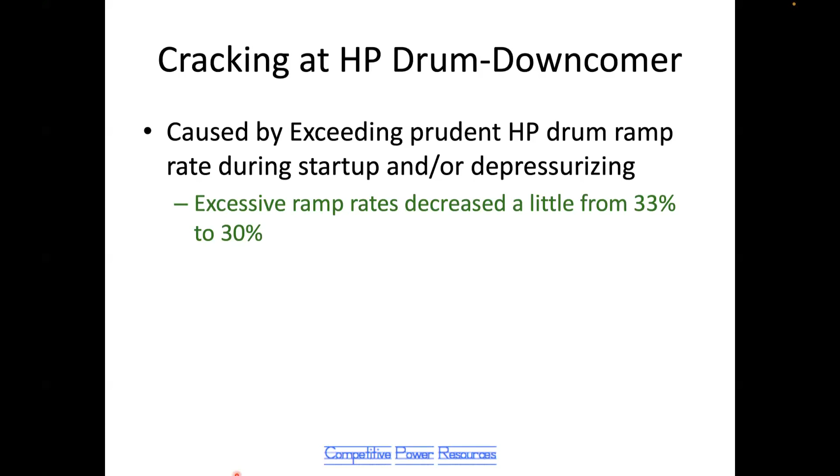Okay, now we will talk a moment about the HP bypass pressure control valve. Over the last, I would say, 8 or 9 years, this has become more and more common. The erosion that we see is caused by water or wet steam passing through the HP pressure control valve. When the water passes through, it erodes the seating surfaces; it also erodes other parts of the valve - in severe cases, the cage and the plug.

When the seating surface damage gets bad enough, the valve begins to leak steam. Most of the time, there is a carbon steel pipe downstream of the pressure control valve. When this superheated steam starts leaking through the valve during operation, it overheats that carbon steel pipe.

If you find yourself in that situation, the only safe alternative is to manually open the pressure control valve to its minimum operating position. That will allow the desuperheater downstream to automatically come into service and cool the downstream pipe work. You absolutely should not manually open the desuperheater spray valve to try to cool the downstream pipe work with the pressure control valve closed. If you do that, you guarantee to crack pipe work downstream of the desuperheater.

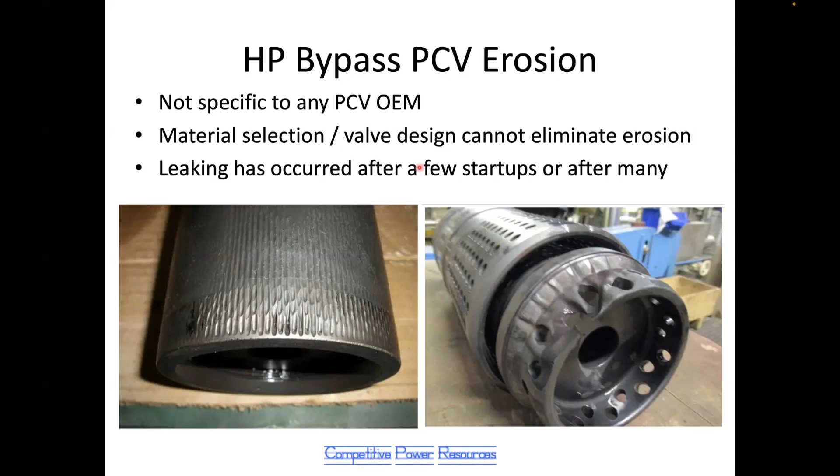This can occur, the one on the right here, this occurred after like 2 startups on this unit. This happened every time they'd overhaul the valve, they'd start up twice and it would go back to leaking. Then, a couple months later, they would shut down and find this in there again. Sometimes it happens slowly, sometimes it happens very fast.

So where does the water come from? It can come from undrained condensate in the HP superheater. All this discussion we had about draining the superheater - if you don't drain the superheater, and you generally initiate steam flow by opening the HP bypass. You either open the HP bypass or you open a HP sky vent, startup vent. If you open the HP bypass, all of that water, that 3,000 kilograms of water, plus more, ends up traveling with the steam through the HP bypass valve. So that's one way to damage the valve very rapidly.

Leaking Attemperator spray water can also find its way to the HP bypass valve. If you have a final Attemperator, which is located at the outlet of the HP superheater, leaking spray water at that location can also find its way through the bypass valve.

And the more insidious one is undrainable water trapped in steam pipes. Steam pipes over time, and their support system, may move and create low points where no drain is located. The pipes can deform, like the picture I showed you of the reheater outlet pipe that actually took a permanent bow and created an undrained low spot, or the hanger system may cause locations of the pipe to be up or down relative to where they were designed to be. So there may be water in that steam pipe work that finds its way through the valve that you don't even know is there.

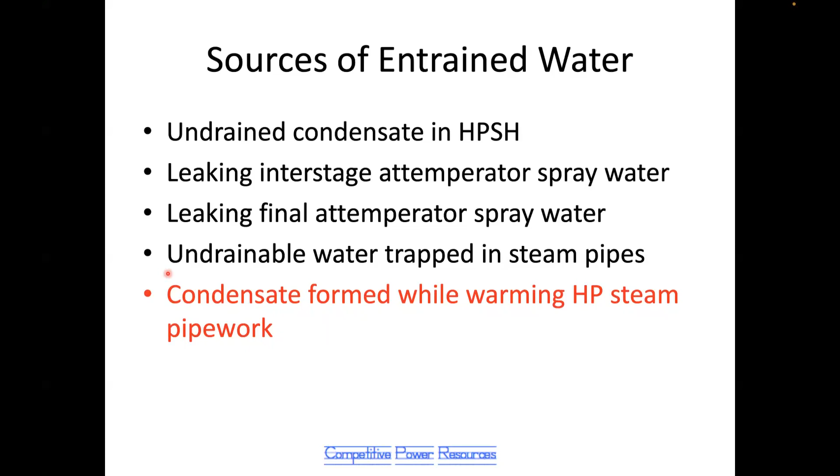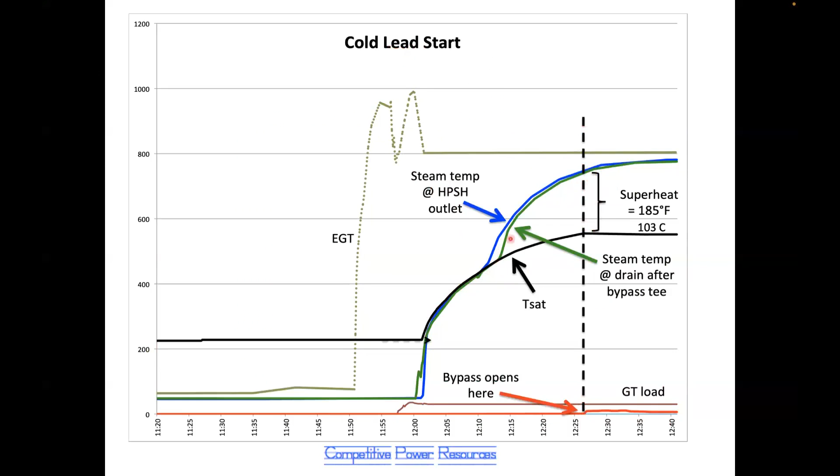The bypass opens here. By the time the bypass opens, there's 103 degrees superheat in the steam it's receiving. So there's no problem with this cold lead start. The first unit starts cold, no problem at all. That's because we have this substantial warming flow through all that pipe work, in particular through this section of pipe work.

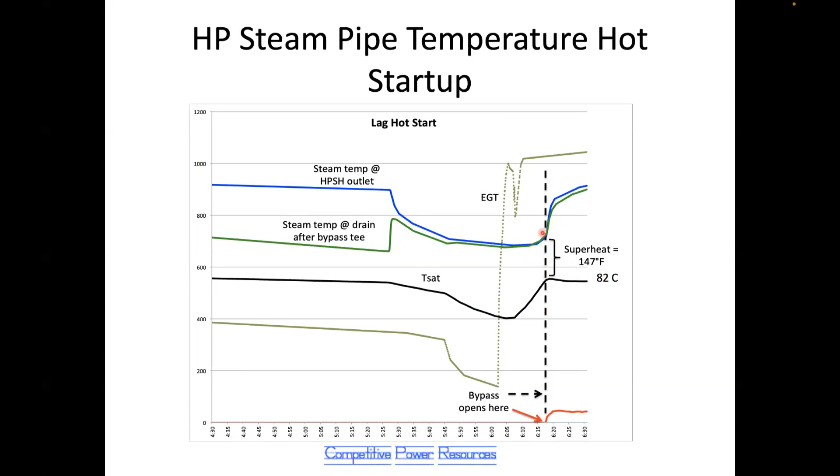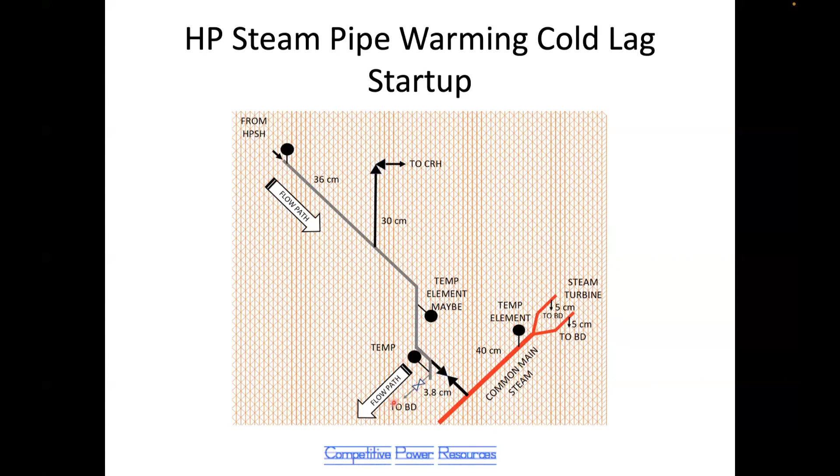This is not a warming drain. One, it's too small, and two, it's controlled by level devices in this drain pot, and it only opens to let out water. It does not open to remove steam. So what's the data look like?

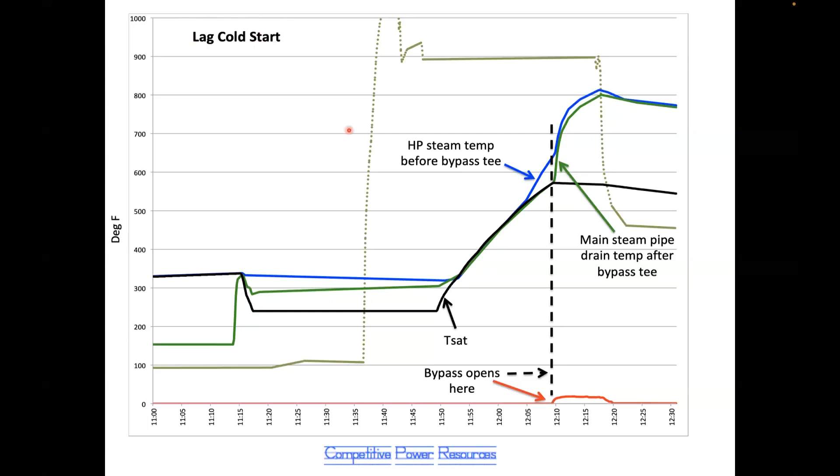So the basic actions to avoid bypass valve erosion: make sure you drain the HP superheater early in the startup, both for the superheater's sake and for the HP bypass sake. Ensure that your attemperators are not leaking.

You need to review the DCS data to determine if you have superheat at the pressure control valve when it's opened. If you look in the manuals for the suppliers of the pressure control valves, you will find they say you must have some superheat before opening the valve. They don't generally give you specify how much superheat.

Discussions with the designers of these valves, it looks as though something on the order of 25 degrees C superheat is sufficient to protect the valve from damage. You may have to install additional thermocouples on the pipe work going in front of, upstream of, the bypass valve in order to get sufficient steam temperature information to make this decision about when to open.

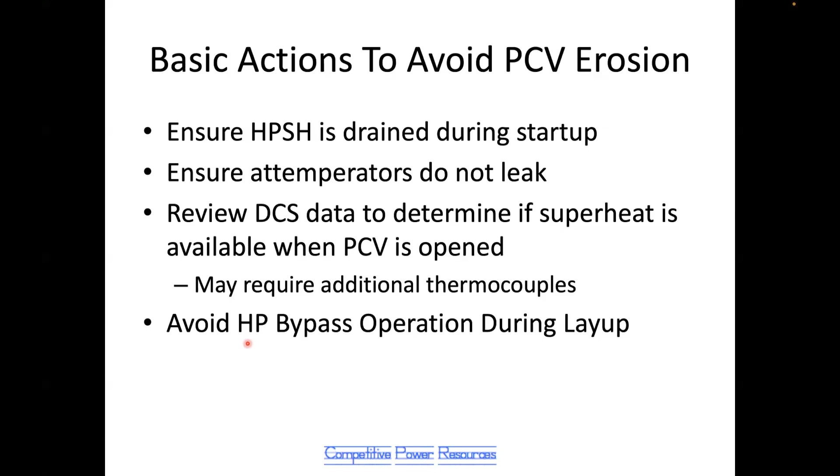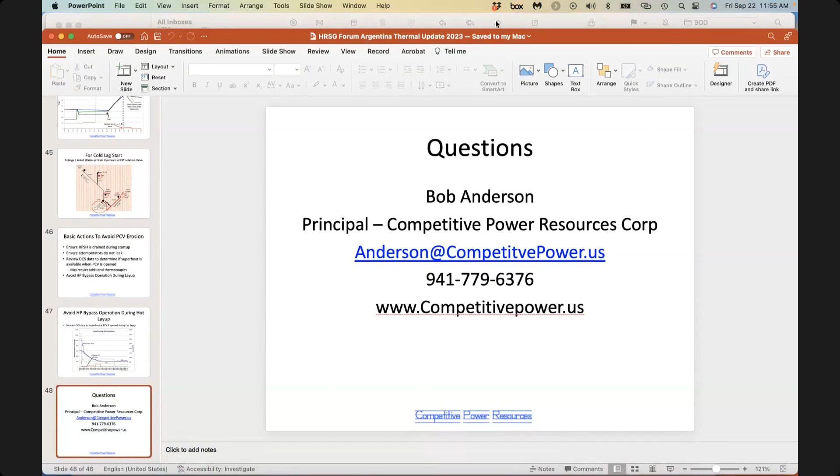If there's no questions, I want to take a minute to thank you for organizing and giving this information, and making this Argentinian forum possible. We are very proud of having this meeting and all the participants that made an effort to participate. I hope we can have more of these events, these meetings, to share knowledge. We are very thankful for making this possible.

Thank you, Franco. I think there was a lot of interest. We had 50 people stay to the end of two quite long presentations, so that was very good. I think Bob and I look upon this as the introductory meeting here with you. We'd like very much to keep in contact, and I think if you have any questions, you can always just contact us at any time.

That's correct. And Franco, if any of your 50 colleagues there have any questions about anything, I know when it's in a different language it's sometimes a little difficult to comprehend. But maybe think about some questions afterwards and raise them with us. You can always suggest other topics we didn't cover today. We tried to highlight the major things that happen in HRSGs around the world, and if you have other thoughts about something you'd like more detail on, come back to Bob, myself, or Scott, and just suggest that. We're very open to that.